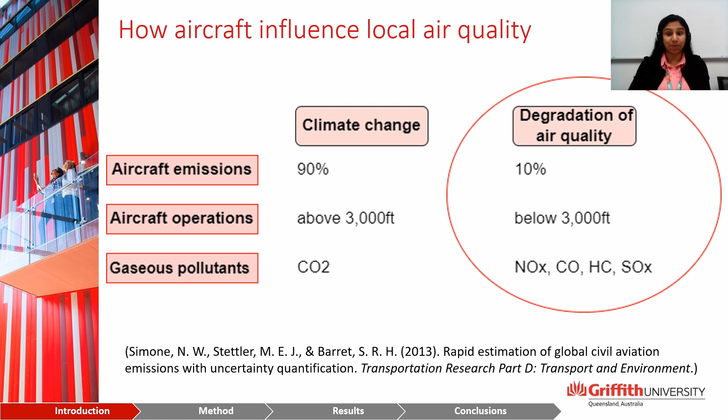Aircraft influence the environment in various ways. Aircraft operations below 3,000 feet cause degradation of air quality by emitting gaseous pollutants: nitrogen oxides, carbon monoxides, sulfur dioxides, and hydrocarbons. However, 90% of aircraft emissions influence climate change, while 10% influence the local air quality. Even though only 10% of aircraft emissions influence the local air quality, it directly impacts all living beings.

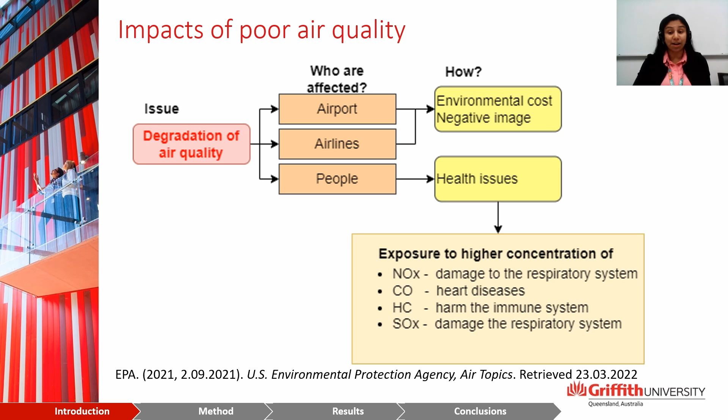This is an issue for the aviation industry because poor air quality is an environmental cost for airports and airlines and gives them a negative image. Therefore, this research directly examines the impact of aircraft on air quality. The research problem was constructed considering two main areas. Firstly, around 70% of aircraft emissions include carbon dioxide causing climate change. Therefore, climate change gets priority over local air quality. However, in addition to climate change, it is imperative that the aviation industry focus on air quality.

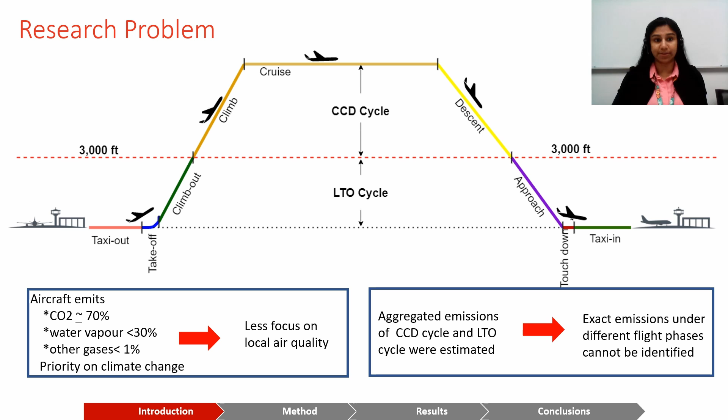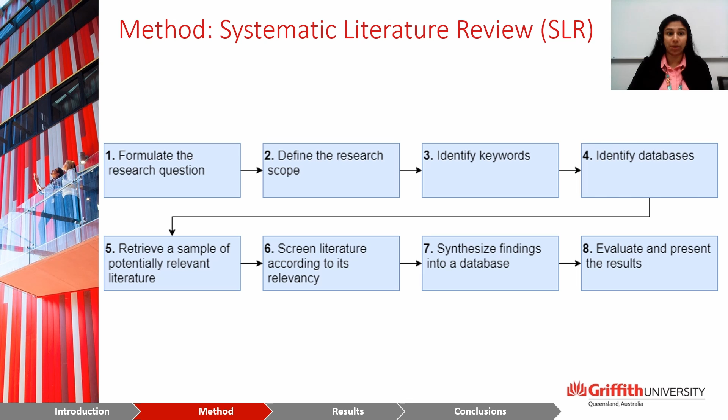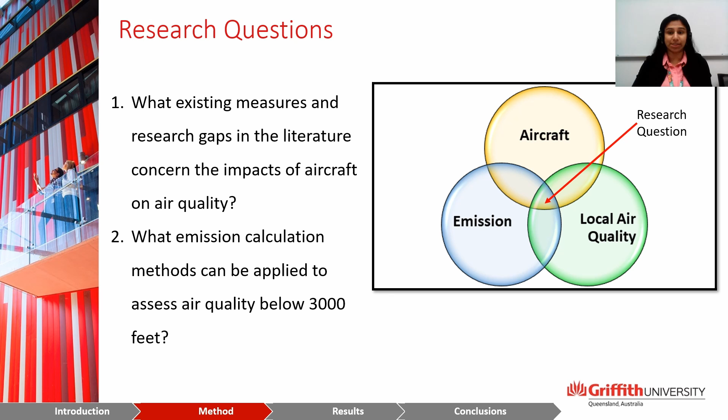These are the steps that we followed when conducting our systematic literature review. After finalizing the research question, research scope, and keywords, a sample of the relevant literature was retrieved from the selected databases. This literature was screened, the findings were synthesized, and the final step was to evaluate and present the results. Two main research questions were addressed through this systematic literature review. What existing measures and research gaps in the literature concerned the impacts of aircraft on air quality, and what emission calculation methods can be applied to assess the air quality below 3,000 feet.

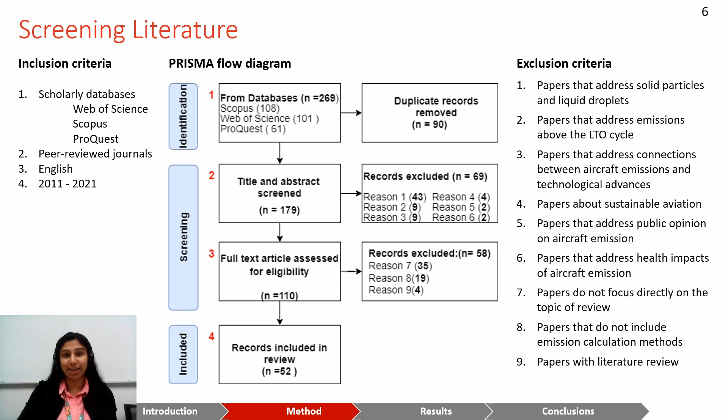IPCC categorizes the emission calculation methods into tiers. Tier 1 is purely based on fuel supplied. Tier 2 is based on the number of LTO cycles and fuel. Tier 1 and Tier 2 are basic methods with minimal required data. Tier 3 uses operational data of individual flights. Tier 3A is based on origin-destination pairs. Tier 3B uses sophisticated models. However, according to 52 papers reviewed, the ICAO advanced approach under Tier 3A is the most used method.

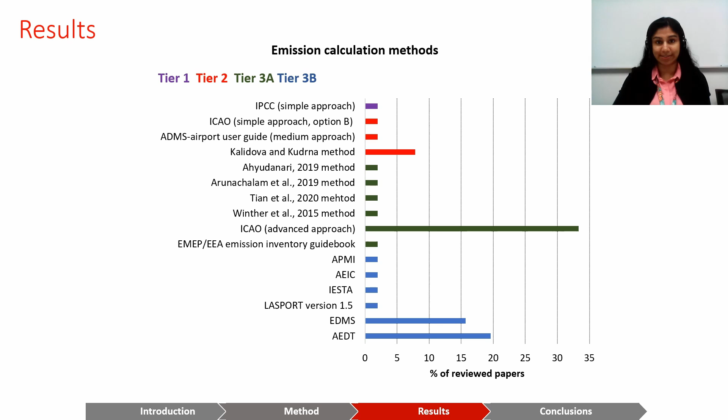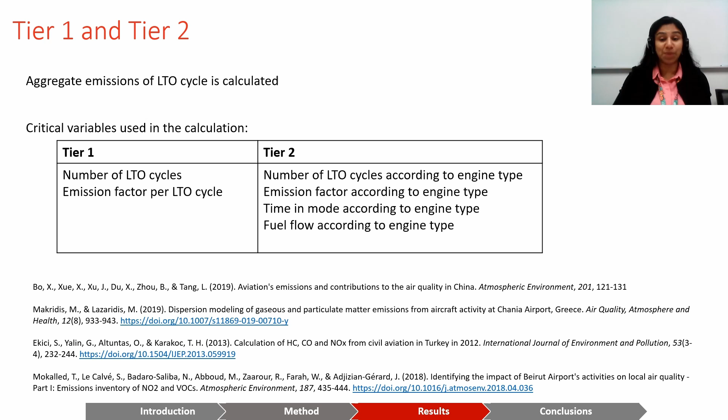Tier 1 and Tier 2 measure aggregate emissions of the LTO cycle. The table shows the key variables used in Tier 1 and Tier 2 to estimate emissions. Key references under Tier 1 and Tier 2 are also mentioned below the table. Tier 3 methods calculate emissions under different flight phases. Mode-specific emission factor, mode-specific fuel flow, and time in mode values are the key variables used in Tier 3A to calculate aircraft emissions. The emission factor and fuel flow values obtained from the ICAO Engine Emission Data Bank follow the international standard atmosphere. Tier 3B software uses the actual operational values of each aircraft, engine-specific aerodynamic performance data, and meteorological data to estimate aircraft emissions.

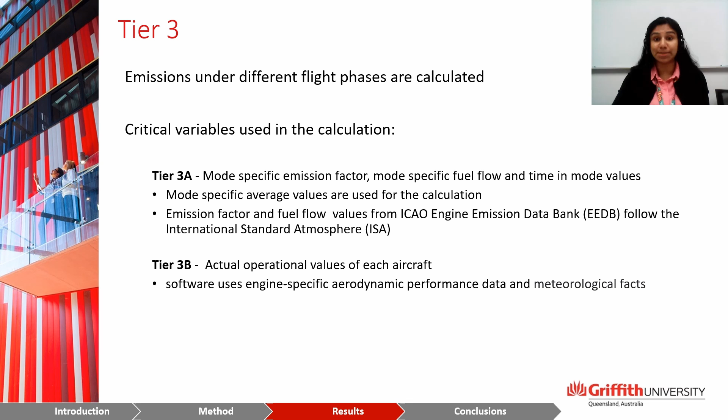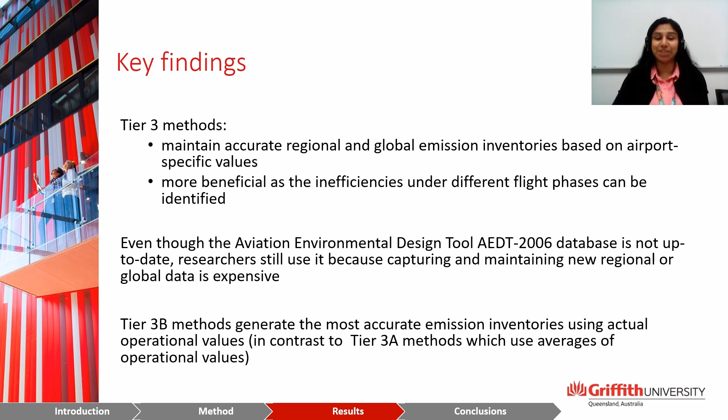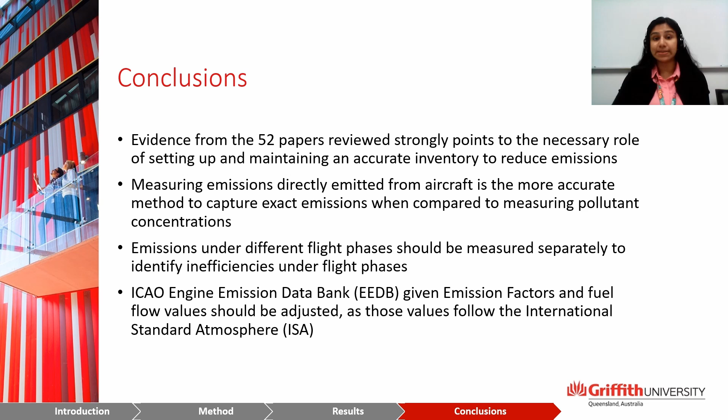Conclusions: By reviewing 52 papers, it is imperative that the aviation industry maintain accurate emission inventories to assess the local air quality impacts. Emissions directly emitted from aircraft capture the actual emissions when compared to measuring pollutant concentrations of the atmosphere. Emissions under different flight phases should be measured separately to identify the inefficiencies of those phases. When using the ICAO engine emission data bank values for emission factor and fuel flow to estimate the emissions, those values should be adjusted considering actual atmospheric conditions.

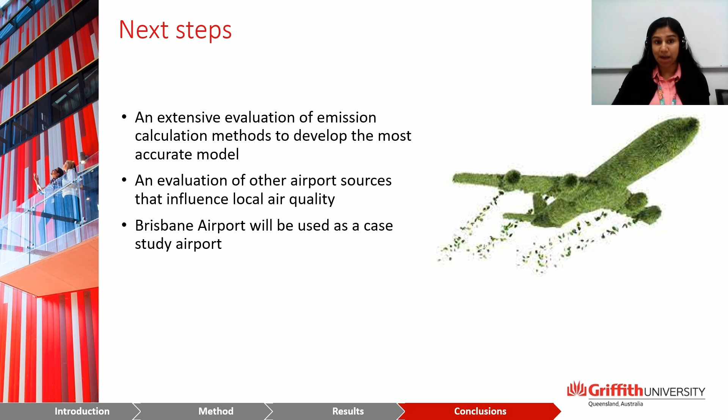Next steps, we will extensively evaluate emission calculation methods to develop the most accurate model to estimate emissions around the airport. We will evaluate the influence of other airport sources on local air quality. We will use Brisbane Airport as a case study to apply our model. I believe we could help airlines and airports to improve the ambient air quality.